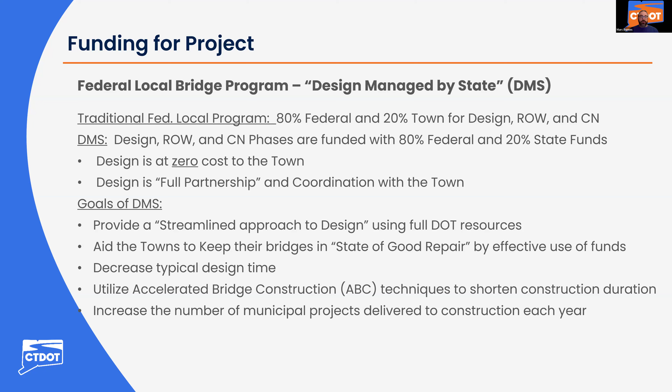The goals are to aid the towns to keep their bridges in a state of good repair by effective use of funds, decrease typical design time from 60 months plus to a 24 to 36 month design timeline depending on permits. When applicable, utilize accelerated bridge construction, or ABC techniques, to shorten construction duration, and most importantly, to increase the number of municipal projects delivered in each construction season.

I'll now turn over to Joe Bragaw, Public Works Director, for some remarks. Joe? Yes. First, I want to apologize. The first selectman, Dan Cunningham, did want to be on this Zoom call, but he was pulled away to another meeting. So I'm here representing the town. I also have my Deputy Public Works Director, Alex Close, on this Zoom call.

I just mainly want to reiterate the last slide, that the town of East Lyme is aware. We requested DOT to enter this program. We want to work together as a partnership. There are some issues—we've had barriers up on the bridge, the railings are deteriorated, the bridge needs work. We've been working with the DOT, and part of this process is we're the conduit for the town. If residents have any issues, they can certainly call the DOT, or they can call us. We're all working together on this project to make it a successful project for all.

There's a lot of information in this PowerPoint, so I will kind of keep it at that right now. But we are working as a partnership with this group, and we look forward to a successful project.

Great. Thank you, Joe.

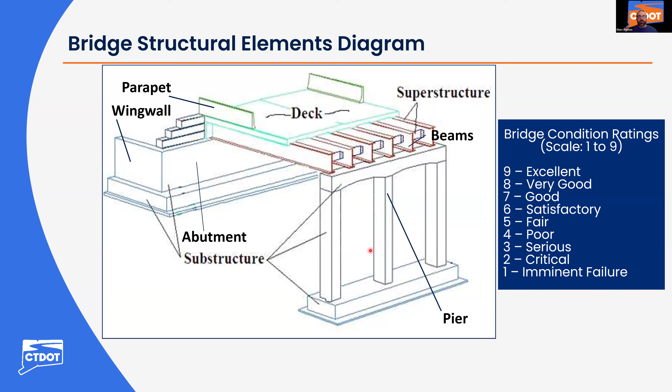I'll now turn it over to Connor Oakes for the formal presentation. Connor? All right, thank you, Mark. Good evening, everyone. As stated, my name is Connor Oakes. I am the project engineer for the proposed project we are here tonight to discuss, and I'm looking forward to telling you guys more about it. So, without further ado, I'll get started.

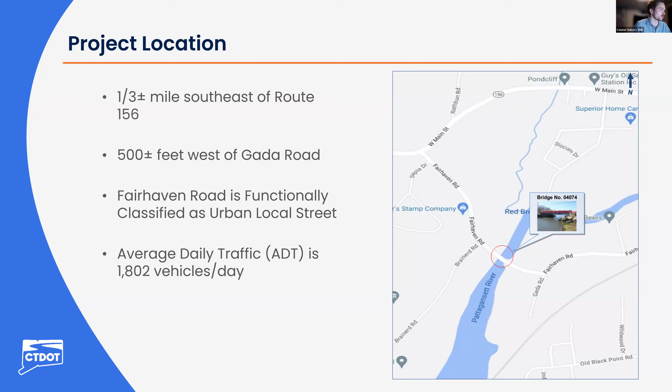Some important facts about Fairhaven Road: it is functionally classified as an urban local street. The latest DOT traffic count published is 1,802 vehicles per day. However, the town of East Lyme did do an independent study in 2024 that indicated a similar number, but the most recent one is just over 1,900 vehicles.

As you can see here, just another aerial view, which gives a better characteristic of the surrounding area, which is lightly developed residential. There are no sidewalks going over either side of the bridge or in the near vicinity of the structure. And as you can see on the south side of the bridge, there are a few docks shown there, and others upstream as well that would not be shown.

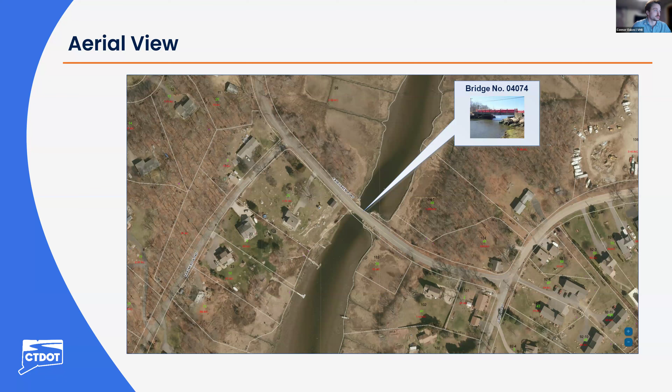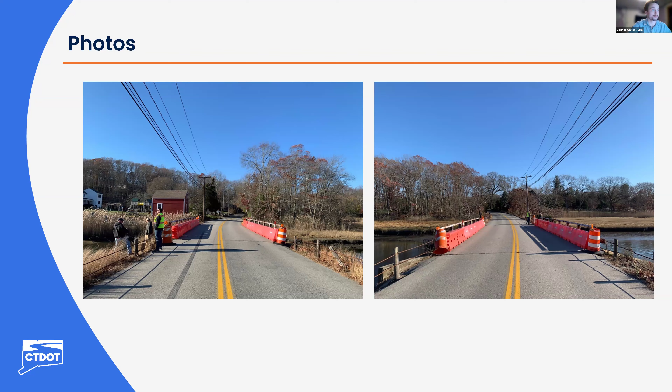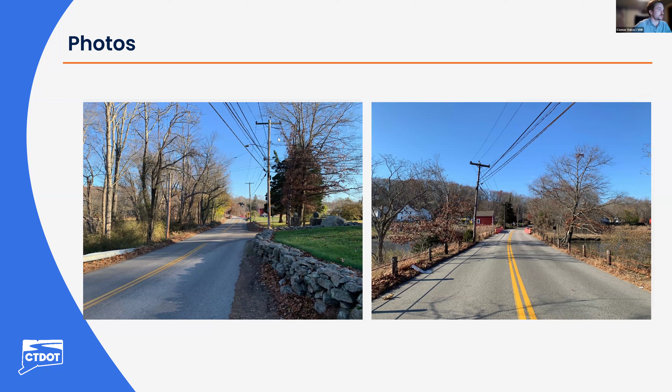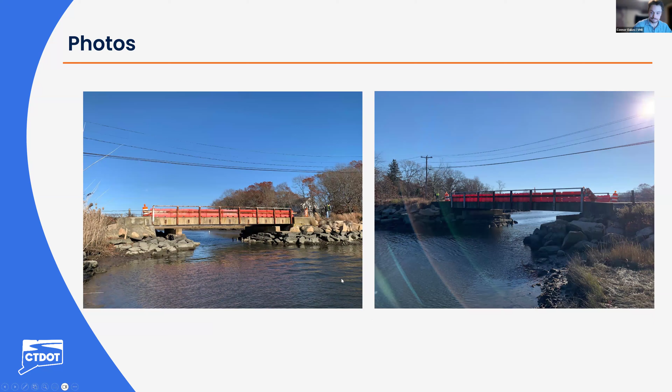So to the left, you are looking upstream, and to the right, you are looking downstream, and we can see those docks that I mentioned earlier on the location map or aerial view that we were looking at.

So a little more about the project in general. Why are we doing this? The purpose is to address the noted structural and functional deficiencies by replacing the bridge, improve hydraulic performance, and leave the structure in a state of good repair for future users.

As mentioned, the bridge is functionally deficient due to narrow curb-to-curb width. The existing curb-to-curb width is 23 foot 8 inch. With the barrier in place, it's 20 foot 6. It must be widened and repaired to meet current standards. The reason for the barriers is the critical condition of the railing, which we'll look at a little closer.

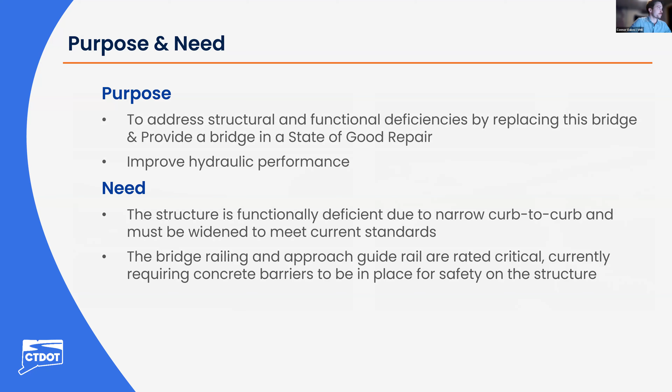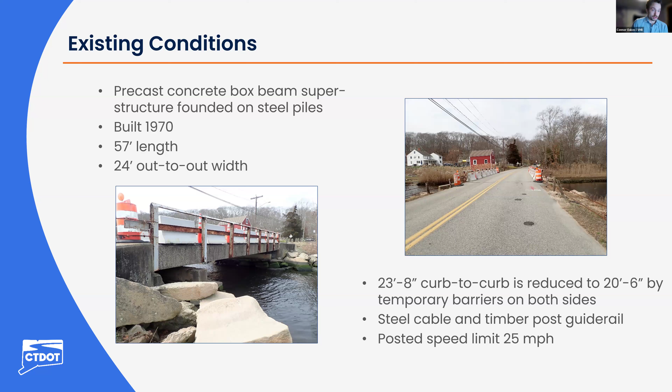It was originally built in 1970, 57 feet long. It's 24 foot out to out, meaning outer face of railing to outer face of railing, and 23 foot 8 curb to curb, which as mentioned is reduced to a deficient state. Even with a low speed limit of 25 miles per hour, that's unsafe for a bridge.

Just a view showing some figures, the low chord elevations here on the upstream side. As mentioned, the existing superstructure is made up of precast concrete box beams, which generally look like this - there would be reinforcement running through them, not shown.

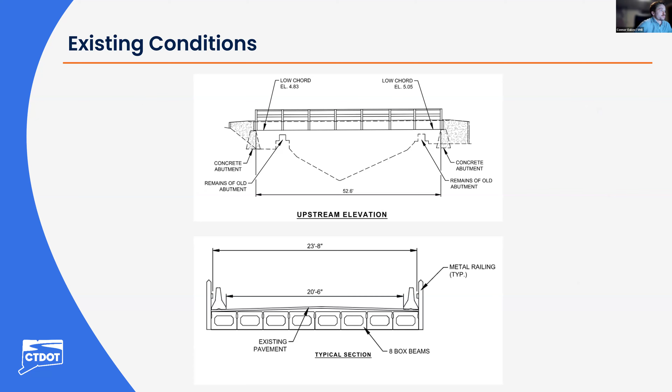As mentioned, the existing bridge is functionally deficient due to the narrow width. It is considered basically intolerable. If you recall from the previous slide, there was the condition rating from 1 to 9. So due to the intolerable nature of the deck geometry, the barriers were put in place to make it temporarily acceptable.

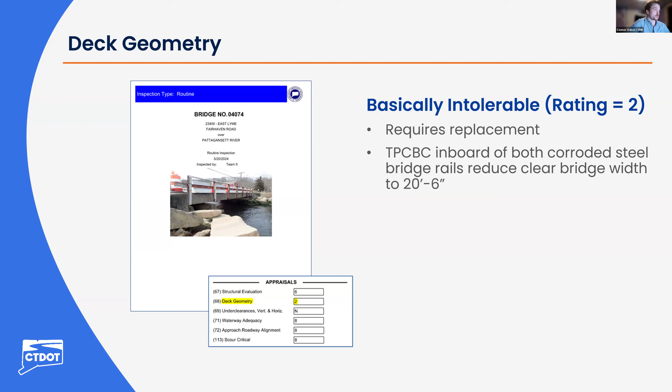A little more into the aspects surrounding the project. Typically with bridge reconstructions, there will also be some full depth pavement work. Although the approaches are in satisfactory condition per the rating, there are issues that could be mitigated, such as transverse cracks, where there are seams in the pavement, which you can see in the middle along the yellow line.

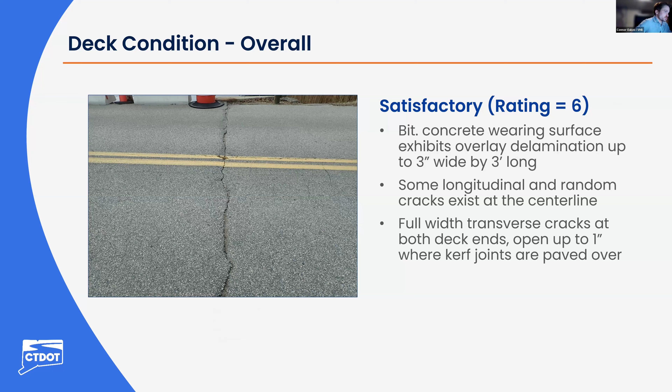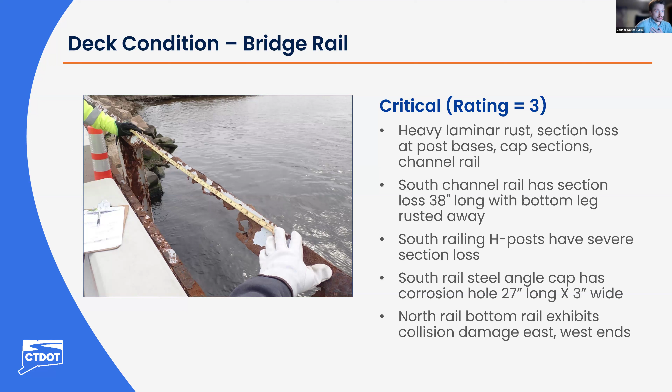So the existing superstructure is also rated satisfactory. The 8 box beams are approximately 3 foot wide each, 57 foot long. There are spalls or deteriorated areas where it has popped out, with loose concrete. You can see in the bottom photo a zoomed in area of one of the spalls where it has also begun to crack. You can see dampness - there has been intrusion of moisture. To the right, the joint, the foam material, you could see at the very bottom of the photo is starting to squeeze out of the joint a little bit.

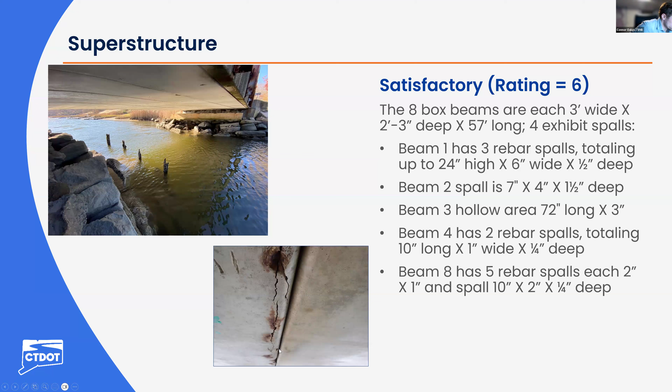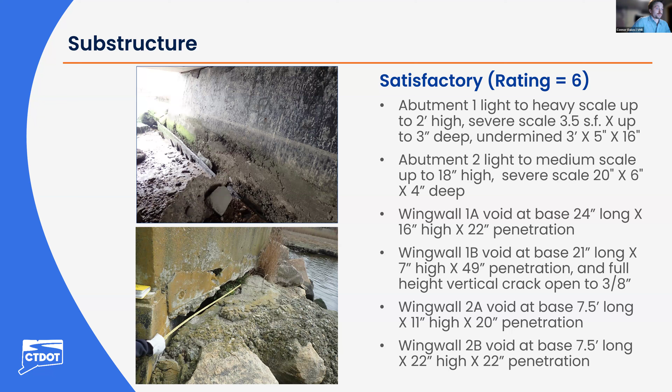So the substructure is again rated a 6. These are the reinforced concrete abutments, which show some scale and voids at the bottom. There is undermining beginning to occur, and obviously this needs to be addressed.

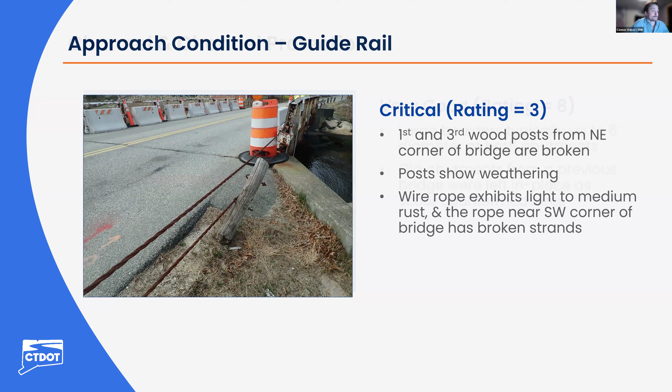The channel itself is considered very good. There are large boulders up to 6 feet in diameter at both abutments, and a benefit is that the old abutments from the previous bridge were left in place as countermeasures for scour.

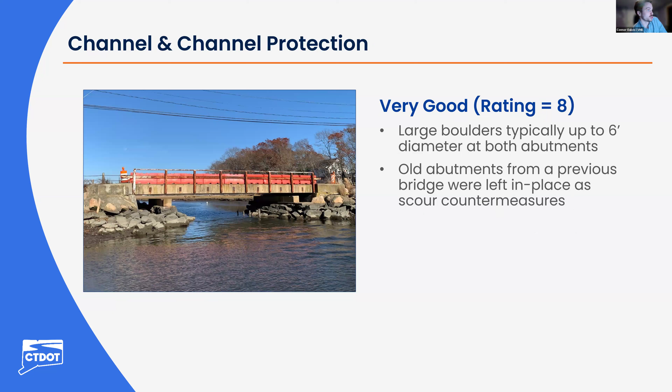The scour is considered to be stable, due in part to the measures currently in place. So this was not necessarily a concern of the initiation of this project. However, it is something that we seek to maintain in its current rating.

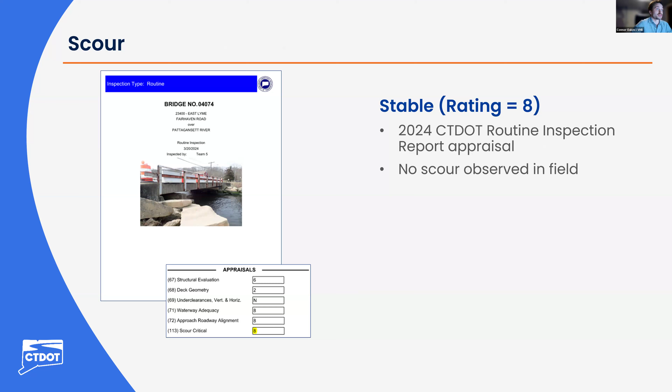As mentioned, there are overhead utility wires which would require relocation prior to the start of construction or any associated crane work with the project. There will be electrical, telephone, and cable wires running pole to pole, which will remain in service throughout the project. The bottom right photo shows about the side where we may propose a water main. It would go on the side of the bridge as shown. That's what that is meant to display.

The replacement bridge will again be AASHTO precast concrete box beams. They will be covered in a 6-inch minimum shear slab with cold liquid waterproofing and an HMA wearing surface. As you can see in the pink, this is the new 3-tube modern galvanized bridge rail, which will be resistant to further corrosion and is crash test rated and safe for vehicles passing over.

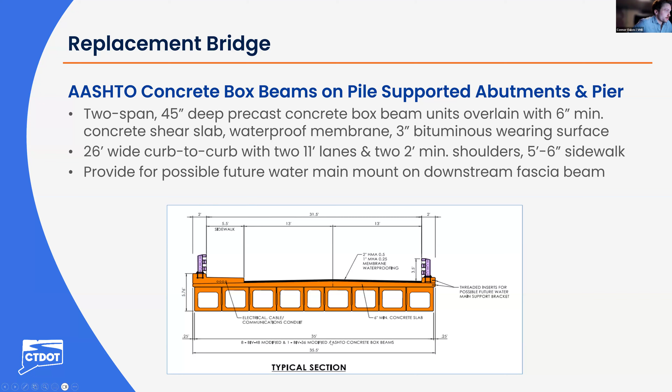You'll see that there is a proposed sidewalk for the bridge. The new structure will be 31.5 foot, 26 foot curb to curb, but 31.5 if you include the 5.5 foot wide sidewalk.

Just want to make sure I didn't miss anything. This is going to be a project where the road will be closed for the duration of construction. As you can see on the right, the detour is approximately 2.4 miles end to end, and it will reduce the construction duration cost.

Environmentally, there are state listed species on site. The northern diamondback terrapin, a turtle, could potentially be influenced by project activities. Measures are provided and required for bridge work between April 1st and October 31st for the turtles. There are also northern long-eared bats present in the project area.

CT DEEP Fisheries requires at least 50% of the existing river channel to remain open for fish widthwise at all times. The river is tidal at the bridge and supports various fish, particularly the alewife, which will be protected during migration between March 15th and May 31st for unconfined water work, artificial lighting, and loud construction noise.

Further environmental considerations: there are some archaeologically sensitive areas due to the proximity of the river and other environmental components. A barn at the southwest quadrant may be historically significant, and it will be avoided throughout the duration of the project. Any impacts to the historic stone walls would require additional evaluation; however, it is more likely that they will be avoided rather than reconstructed.

A hazardous materials screening was performed, and essentially that indicates there is some lead-based paint and other materials that would require abatement prior to the bridge replacement.

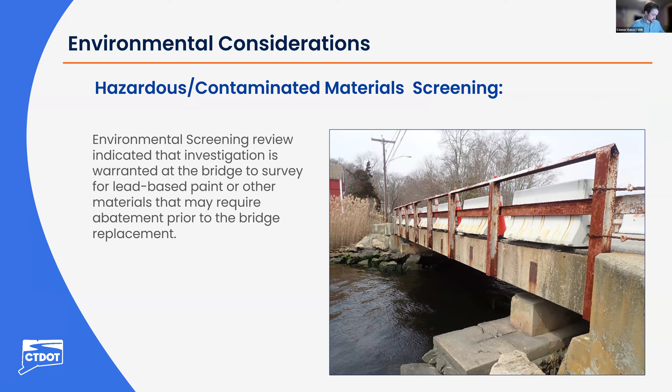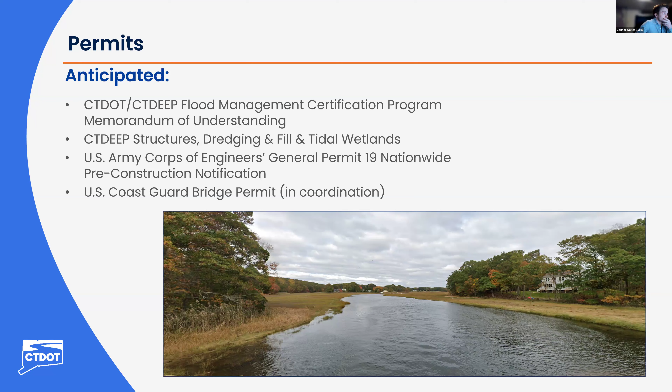The right-of-way will be impacted through as necessary, but minimally throughout the project.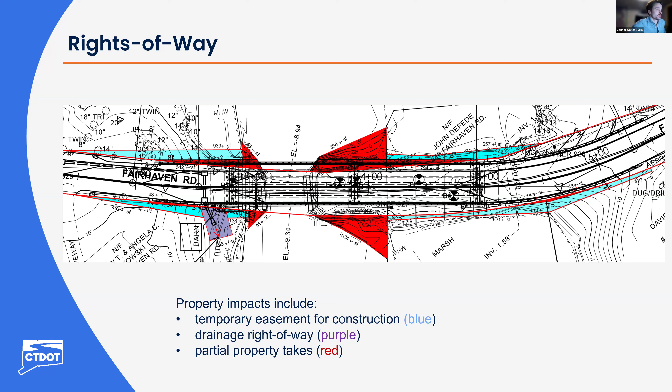And without further ado, I will pass it along to Zach Moreno with DOT to talk more about rights of way.

Thanks, Connor. My name is Zachary Garino, and I'm a project coordinator with the department's Division of Rights of Way. Our office is responsible for acquiring the property rights needed for transportation projects. As Connor mentioned, this project will require the acquisition of property rights, so I'd like to give a brief overview of our acquisition process.

Before I begin, I'd like to mention that specific impacts are still being finalized and may change as the design progresses, and that any required property rights will be acquired in accordance with Connecticut General Statutes, Sections 13A-73, 13A-98E, as well as the Uniform Act.

The right-of-way acquisition process begins once the design has progressed to a development milestone and all the impacts have been determined. At this point, each affected property owner will receive a formal letter of intent to acquire from our office, along with a property map which depicts the exact property rights to be acquired.

On the screen here is an example of a property map that an owner may receive. It's going to show the existing conditions as well as the proposed improvements specific to each property. Next, our office will determine the fair market value of the property rights depicted on that map and use it to establish an offer of just compensation.

That offer will be sent out to the property owner in writing, and a right-of-way agent will be available to meet with the property owner and explain the project, go over the specific impacts to their property, and explain how the state arrived at its offer.

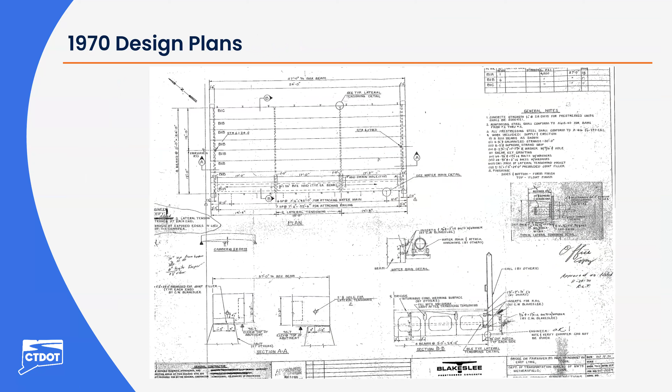I'll help out a little bit there, again, Tom Ryan. We wrestled with this one as to whether it would be one or two spans from day one. We originally designed it as a single span and looked into what it would take to rebuild the causeway. As we got into design, we did borings out there. We found the soil is very, very poor. So we were going to have to construct tall pile-supported retaining and wing walls on that east side, all the way over to, I think, around station 17. The cost of that compared to a new structure was about the same. And we did a life cycle cost analysis. We found out the life cycle cost, even with the additional maintenance, was about the same.

DEEP had also weighed in that they would like to have increased tidal flushing activity upstream, so we're trying to do some restoration of that upstream tidal estuary area. It was a bonus to going two spans. And again, the cost of future maintenance is about the same. So we thought it was a win-win situation. We still feel that way.

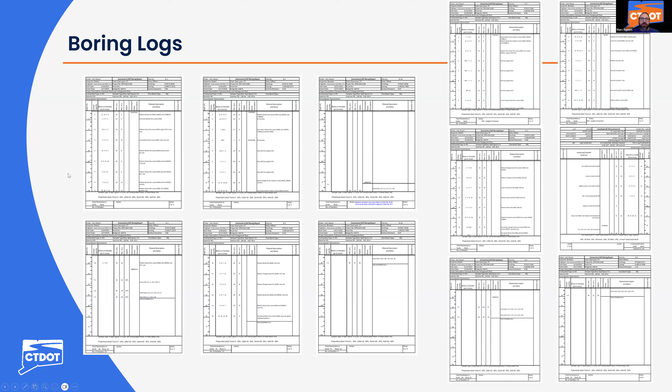Thank you, Connor and Tom. Next question comes from Dan McMahon. With the increase in traffic onto Black Point Road from Route 156, will the DOT consider allowing turning right on red at the intersection of 156 and Black Point Road at Smith's Acres? This will allow traffic to move much more quickly.

I don't believe that signalization was considered as a change for this project. I believe that the detour route, although an inconvenience, will be the best way to conduct traffic throughout this project.

Let me jump in again. Connor's newer to the project, so we're not trying to overdub him, but our other project engineer switched people and I did a lot of the design, so let me explain. When we do a detour route, we have the consultant engineer who's going to design the bridge go out and drive it.

We do a detour checklist that tells you what's good, bad, and indifferent. During that drive-through we evaluate from a capacity standpoint whether right on red is a good idea based on the warrants we have for it. So it will absolutely be looked into. I can't guarantee it because we look at warrants for the stop, and if you have poor sight distance or a school nearby, there are several factors considered to determine whether the State Traffic Commission would advise that or not.

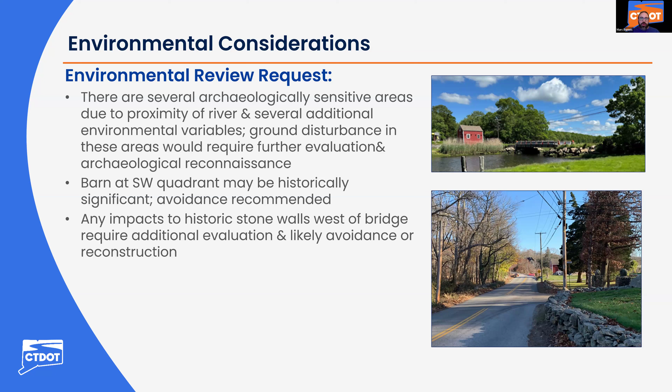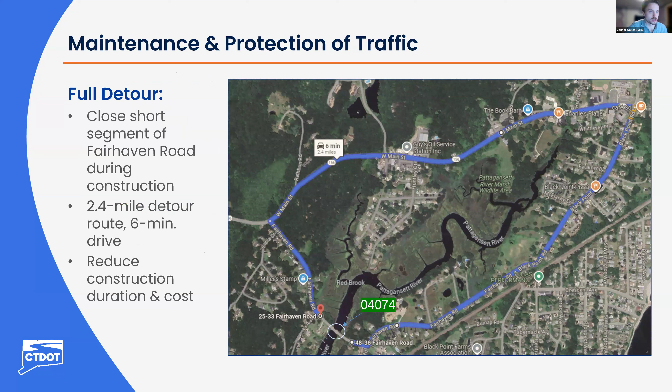How much higher will the new bridge be compared to the existing one? Tom or Connor, if you want to take that. The new bridge will be raised like less than a foot from the original. Okay, thank you.

Mark, I'll jump in, this is Greg Garish. Just to add to that, the vertical clearance of the bridge will be raised about a half foot over the channel. So if that's what was intended for the question, the vertical clearance will be a half foot higher for this condition.

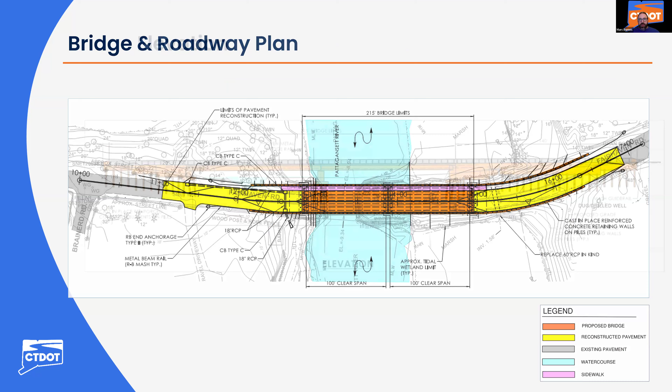Right now, we're not seeing any questions. We can give it another couple of minutes before concluding.

Question from Kate Rattan: How are flood and storm resilience considered in the design of the bridge and adjacent roadway? Greg, if you want to take that one. Yeah, I'll take that one.

Let's start with the hydraulic performance of this bridge, which was pretty good to start for existing conditions. The 500-year flood, or design storm, flows through the bridge with underclearance to the low point. That clearance is now increased by raising the low point of the bridge, or the bottom surface of the bridge. Of course, we considered sea level rise for the state of Connecticut.

DEEP has adopted a 20-inch sea level rise through the year 2050. With that sea level rise included, the 500-year design storm would not overtop the bridge. The FEMA still water elevation is just higher than the roadway low point of the bridge, which is 9 feet. The still water elevation is 9.4, but that elevation includes a wave action element.